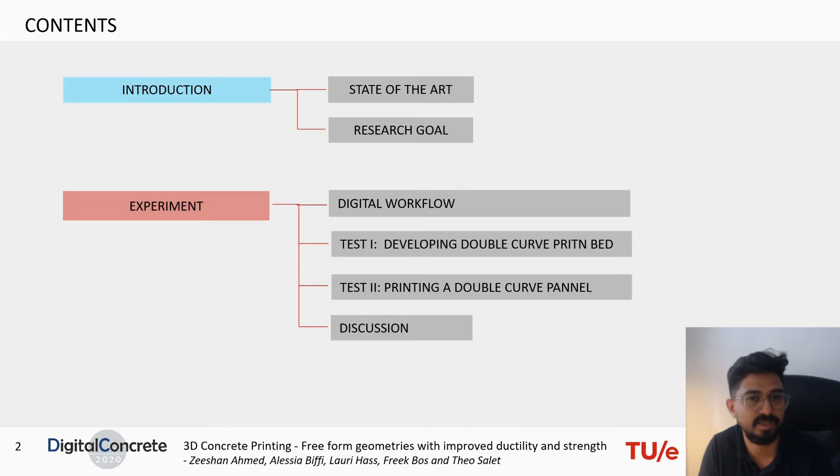Looking into the content of this presentation, I would start by discussing the state of the art relevant for this research, then moving on to discuss the research goal for this project, and finally the experiment. For the experiment, I will discuss a digital workflow and then two tests which are part of the experiment: developing a double curve print bed, and printing a double curve panel. The final test results are discussed at the end.

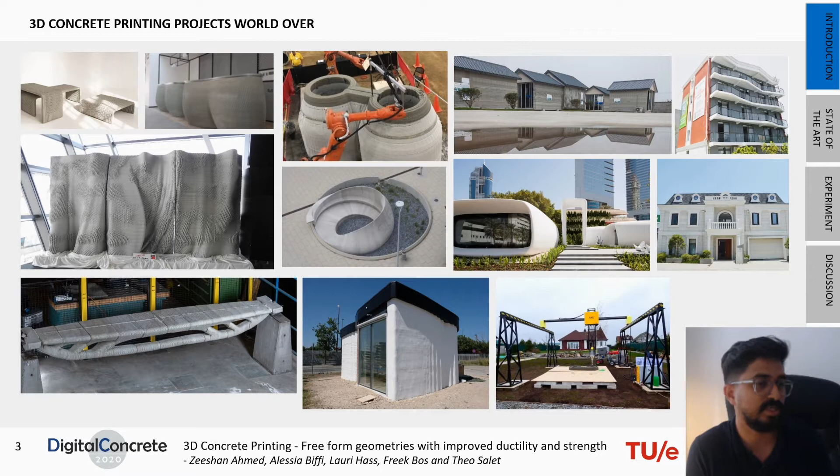Talking about 3D concrete printed projects, the number of projects around the world has increased significantly in the last 5 years. At TU Eindhoven, we have also been part of many of these valorization projects on 3D concrete printing. For example, the Pavilion in 2016, a 3D concrete printed bridge at Gemert in 2017, and there are two ongoing projects: another 3D concrete printed bridge, a 30-meter long bridge at Nijmegen with improved geometrical freedom, and the second is the project Milestone, the 3DCP housing project in Eindhoven.

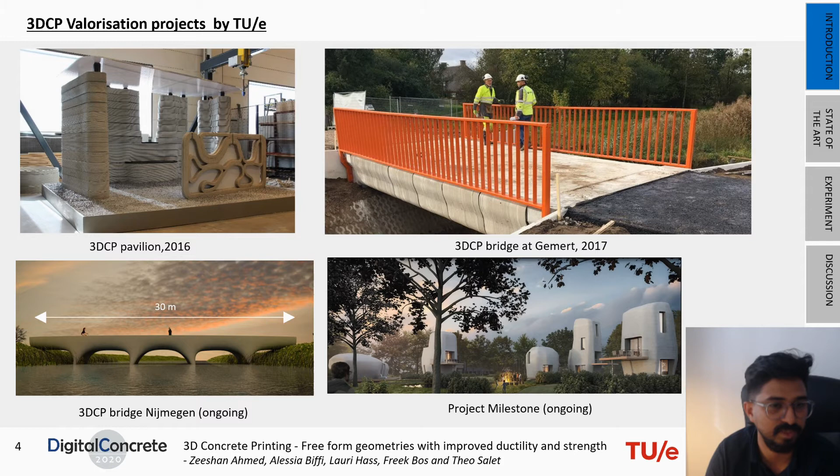Talking about state of the art, I would discuss two topics. One is improving design freedoms, and the second is developing reinforcement strategies relevant for this research project. Talking about improving design freedom, there are two projects which I would discuss.

One is using infill material as a support material for printing, and the second is 3D concrete printing on a double curve print bed. In terms of reinforcement strategies, I would discuss metal cable as a reinforcement strategy, and second, how to introduce fibers into the printed concrete to improve the ductility of the printed structures.

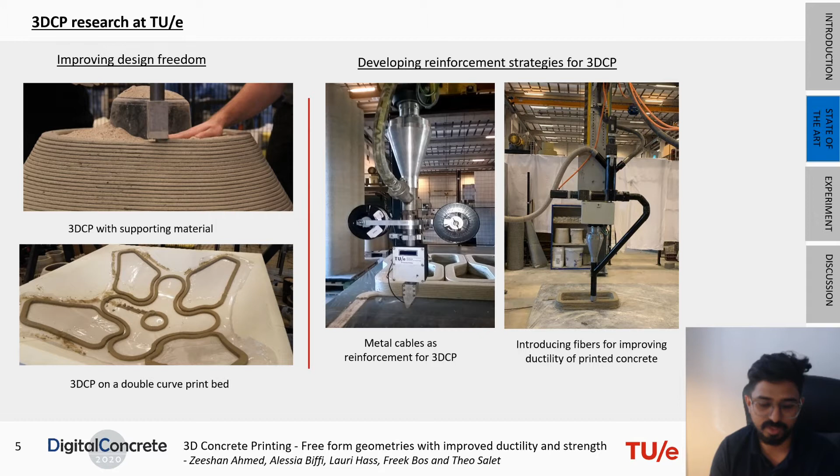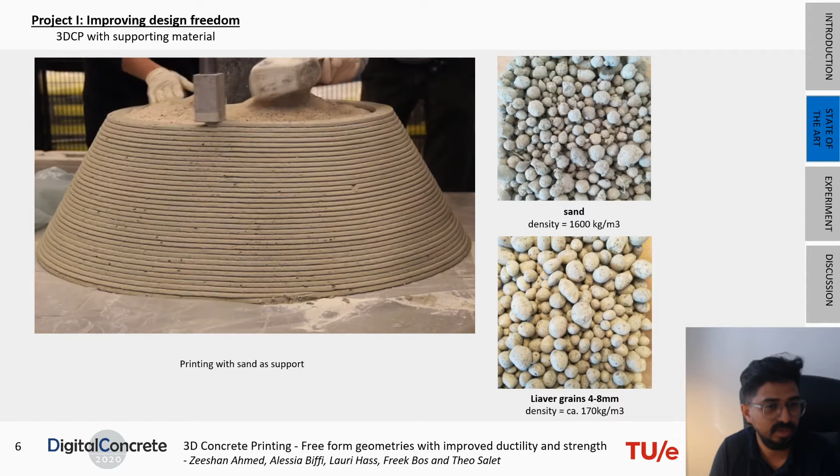Talking about the first project, 3D concrete printing with supporting material, we started this project using sand as a supporting material. But since sand has a high density, we realized we wanted a material with less density or weight to use as an infill material, for which we used Liaver grains, lightweight aggregates used for making lightweight concrete, which have a density of around 170 kgs per meter cube.

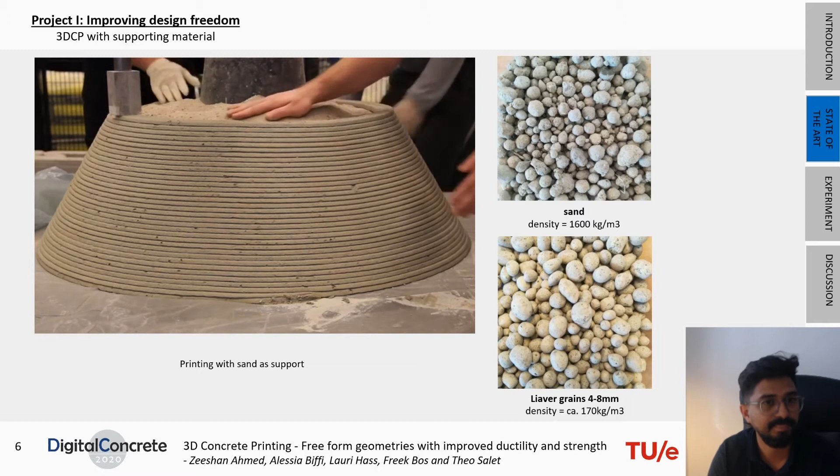For the test, we started by printing in an enclosed box, and simultaneously during the printing process the Liaver grains were added. This showed significant proof of concept, and the project was a success. The next step was to check what degree of freedom we could achieve with this process. For the second test, we checked the maximum angle of inclination, and during this test we realized the best, or maximum, angle of inclination we should limit ourselves to during this process is around 35 to 38 degrees. To make this process more efficient, we also tested it without an enclosing box.

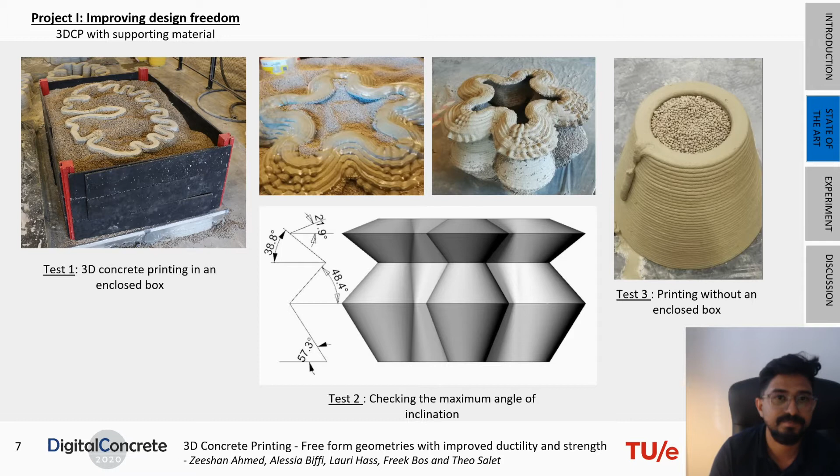Moving on to the second project, 3D concrete printing on a double curve print bed. This project was in collaboration with TU Delft to develop a 3D printed shell structure, for which the outer mold of the shells or panels were printed using the 3D concrete printer, and the shells were filled with concrete. Once these panels dried up, the shells were assembled using temporary support.

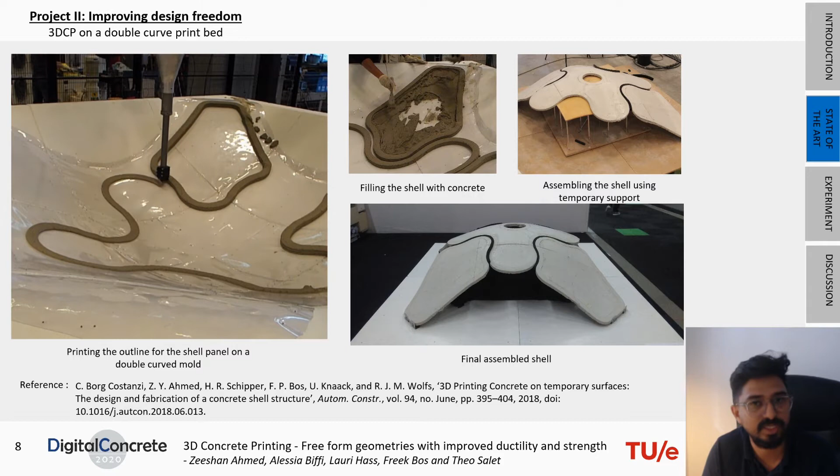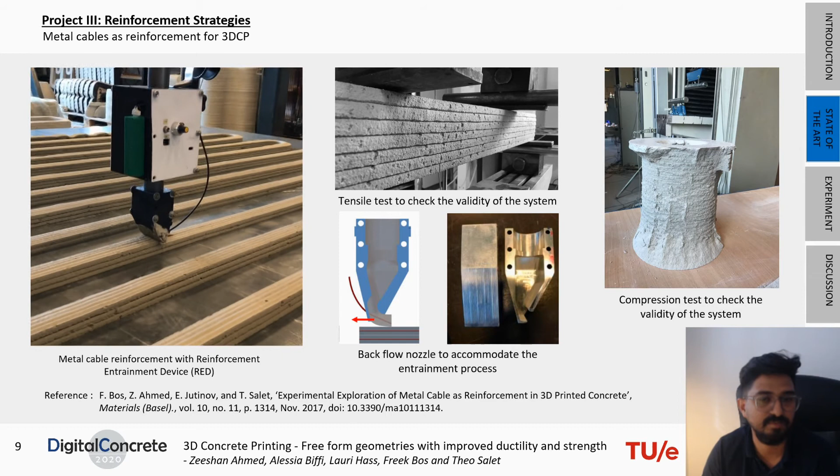Moving on, the third project is on introducing reinforcement into the printed concrete, for which a special device called the reinforcement entrainment device, in short RED, was developed. Special nozzles needed to be prepared with a backflow extrusion, which accommodates the entrainment of these cables. This entire system was tested with various tests like the tensile test and compression test to check the validity of the system. To know more about the test results, please refer to the reference given below.

The final project is on introducing fibers for improving ductility in printed concrete, for which a fiber reinforcement entrainment device was developed. The goal of this device is to introduce fibers into the printed concrete, and this is done using two parts.

First is a fiber suction cum blower device, where fibers are first added manually into the fiber bucket, and through the suction system the fibers are transported into the mixing chamber of the FRED system. In the mixing chamber, the concrete from the concrete pump gets mixed using a motor and a mixing blade, and finally, using another motor attached to an Archimedes screw, the final pumping of the concrete is done, where the concrete comes out of a nozzle.

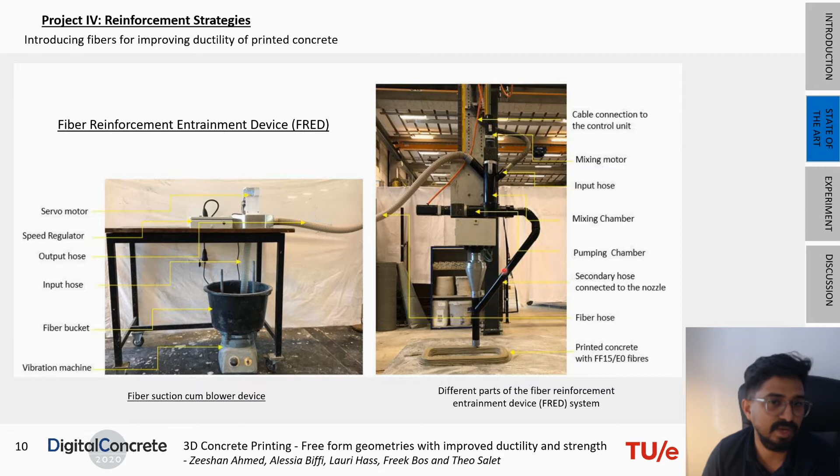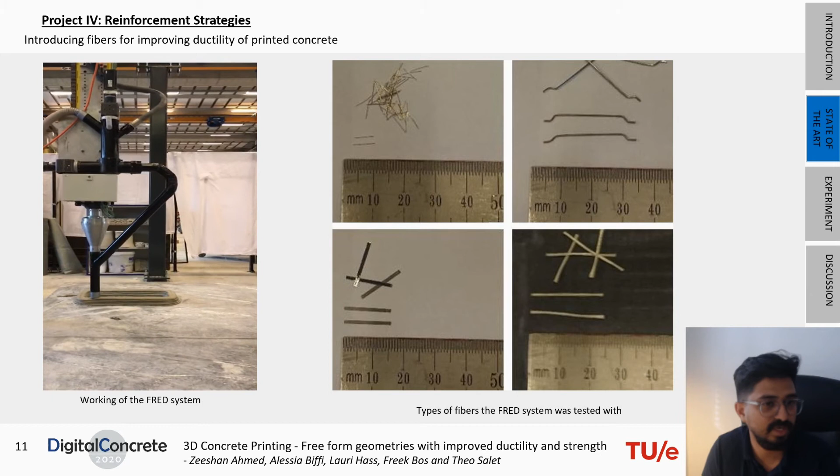To look into the working of this FRED system is shown in the video to the left, and this FRED system was tried out with different types of fibers, both metallic and non-metallic. However, the maximum dimension for the fibers was limited to 30 millimeters, because beyond that, these longer fibers got clogged into the system itself.

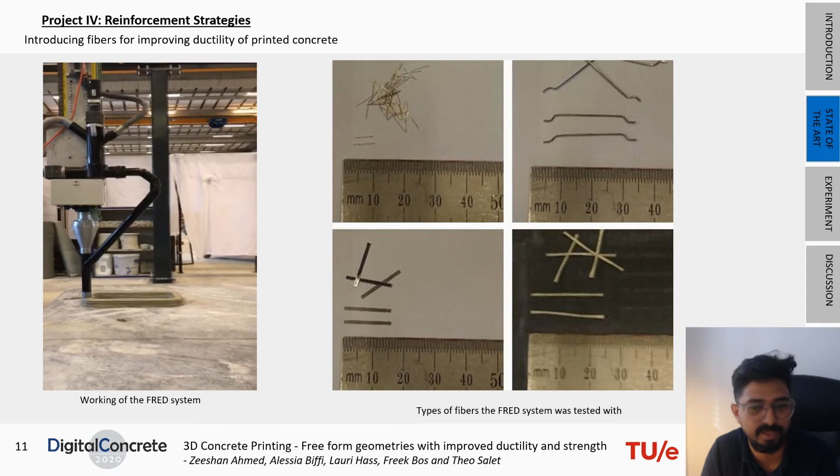So for this research, glass fibers were used, which has a dimension of about 25 millimeters. Once the printing process is done, samples were prepared, and as you can see in the figure, you can clearly see the fibers into the samples.

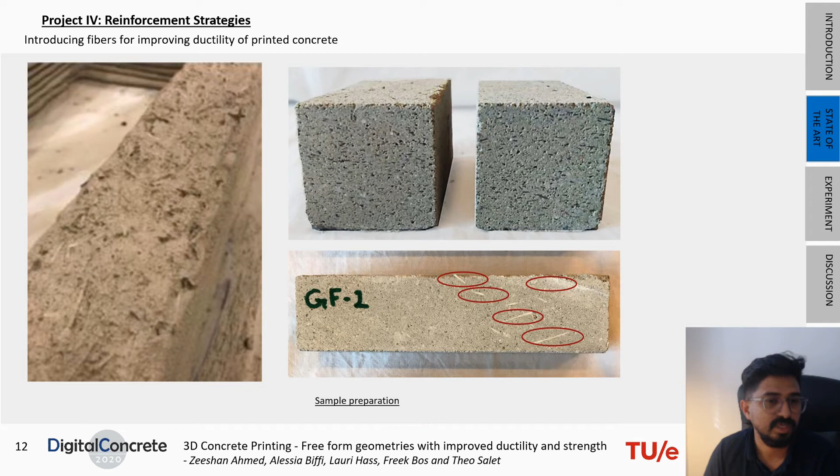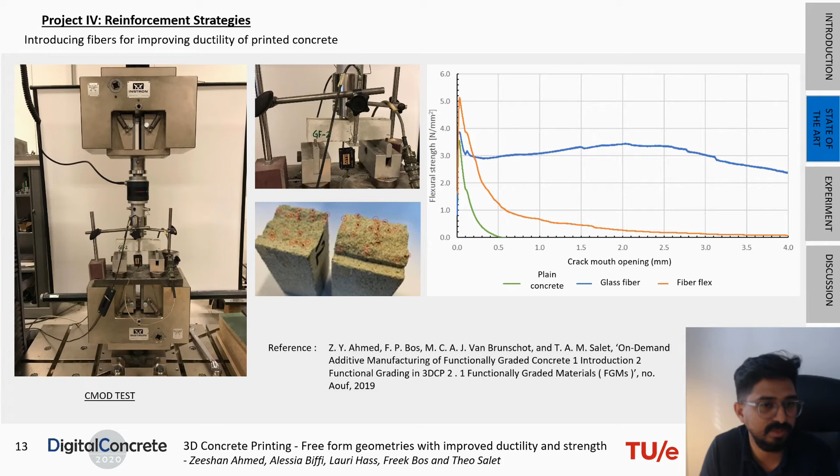These samples, once prepared, were tested with a CMOD test, and comparing the results of plain concrete and the samples with glass fibers, you can see significant improvement in the ductility of the samples. More details of these test results can be found in the reference given below.

Coming to the research goal for this project, the main goal was to develop a proof of concept for all four projects discussed earlier, for which we wanted to design an arbitrary shape to print a free-form object with improved strength and ductility. For this, the experiment, as discussed earlier, is divided into two parts.

The first part is printing a double curve print bed on which the double curve panel will be printed. The double curve print bed was done using the infill material and the RED system for reinforcing the print bed, and second, for the panel, the fibers were introduced using the FRED system.

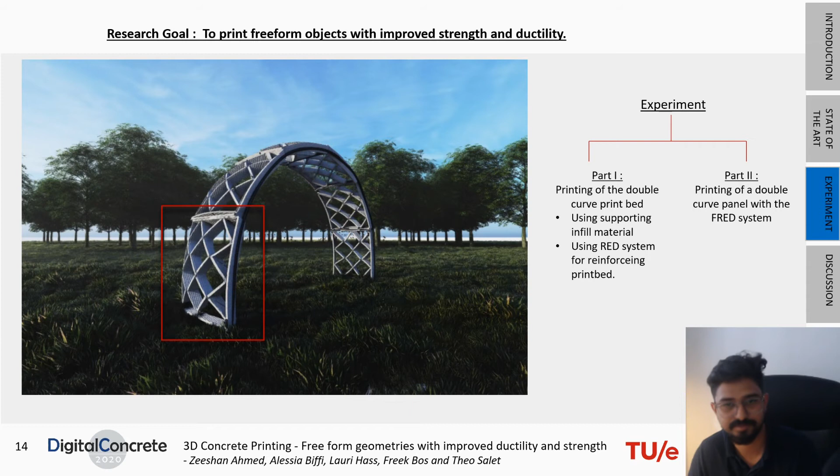Talking about the digital workflow, a script was developed using Grasshopper 3D. The aim of the script was to consider design requirements of the panel as well as the considerations of the robot or the 3D printer itself.

The panel geometry was deduced out of a sphere, considering the maximum angle of inclination, which was kept at 20 degrees as maximum, based on the recommendation from the project on printing on temporary structures.

Moving on, the outline of this panel was used to create the surface of the print bed, and finally the boundary surface was created using a mesh.

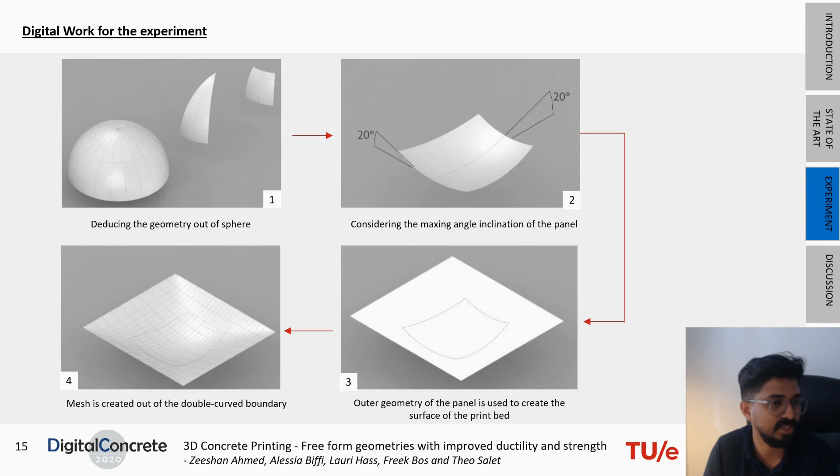Finally, from the mesh, the print bed geometry was developed. To make the print bed, it was tessellated into 4 parts, and each of these parts was rotated 90 degrees before making the print paths for this printing process.

Simultaneously, an internal woven pattern for the panel was also designed to give more internal structure to the panel, and finally both the panel and the print bed were checked to ensure they had the same curvature.

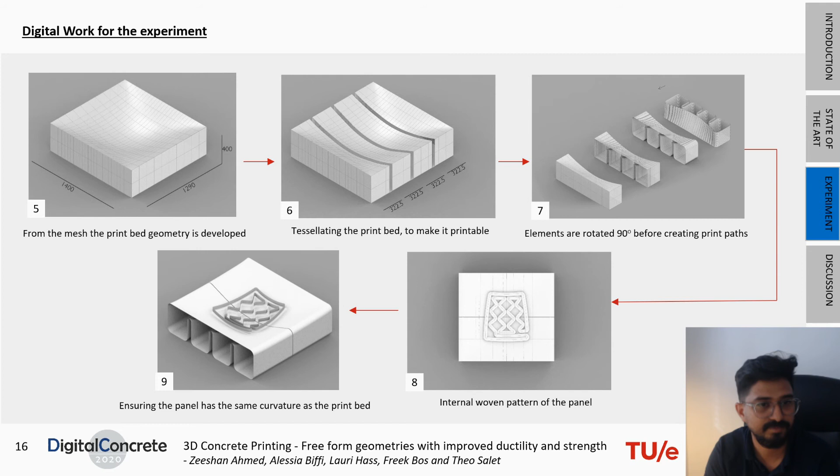Once the print paths were achieved, the printing of the elements was done using the reinforcement entrainment device, or RED system, and you can clearly see from the figure where the reinforcement cable is placed, at the middle or center of the filament. Once all these elements were printed, they were finally assembled.

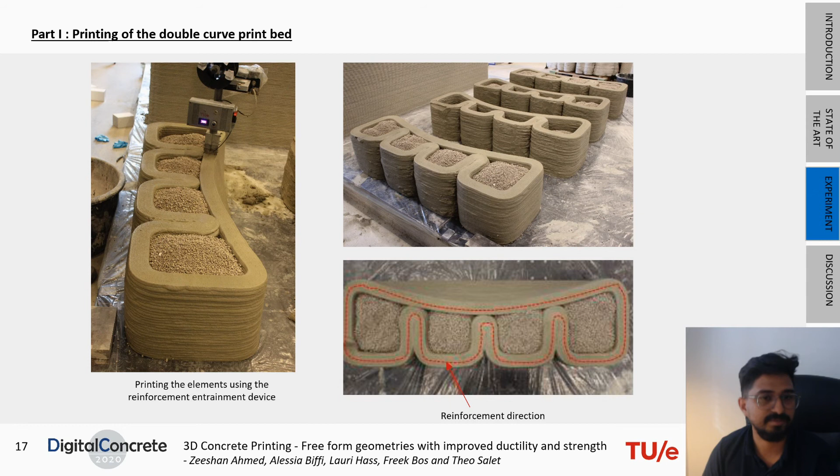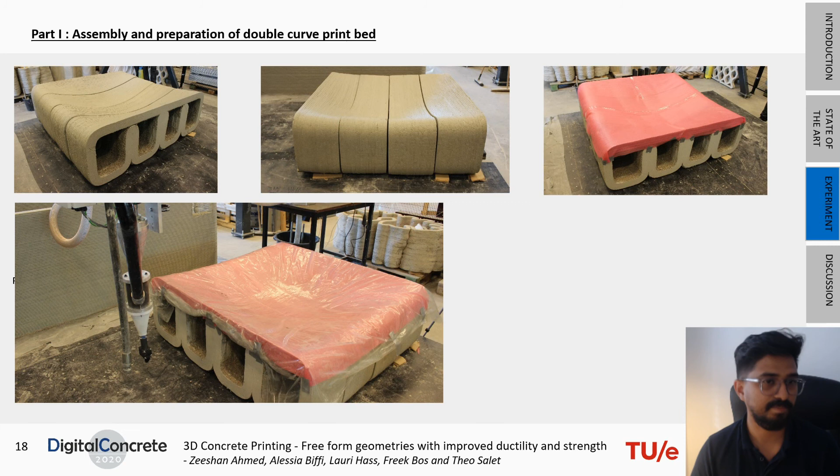During the assembly process, to avoid anomalies, an additional sheet of styrofoam was added to make the printing surface smoother, and to avoid the panel sticking to the print bed, an additional plastic layer was attached. Printing of the panel was done using the FRED system, and for this project the nozzle output was reduced considering the scale of the panel.

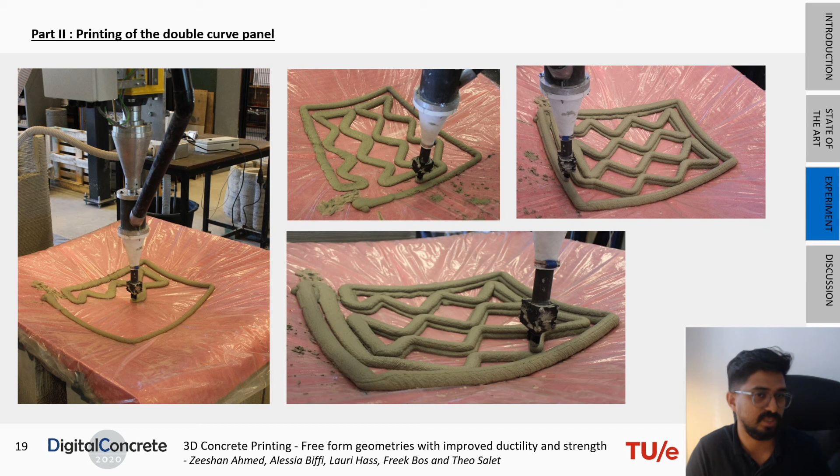During the printing process, as you can see from this figure, some points of the woven pattern were not attached clearly, which was corrected by increasing the overlap between the printed filaments and by adjusting the extrusion rate. Finally, you can see the printed panels developed during this project.

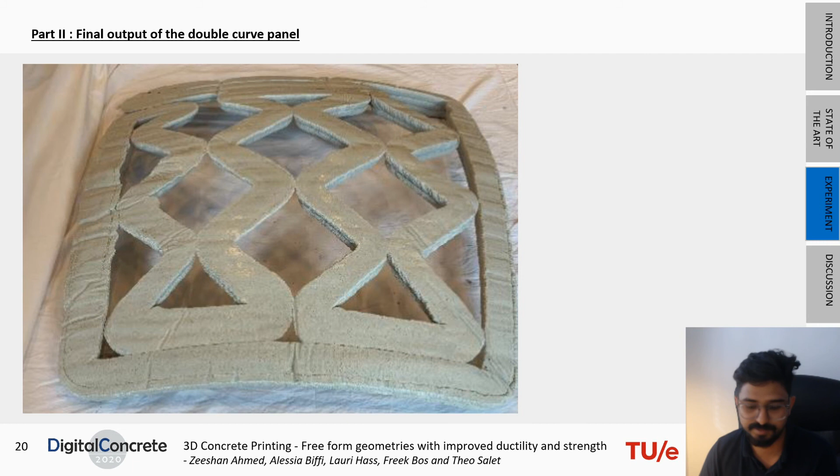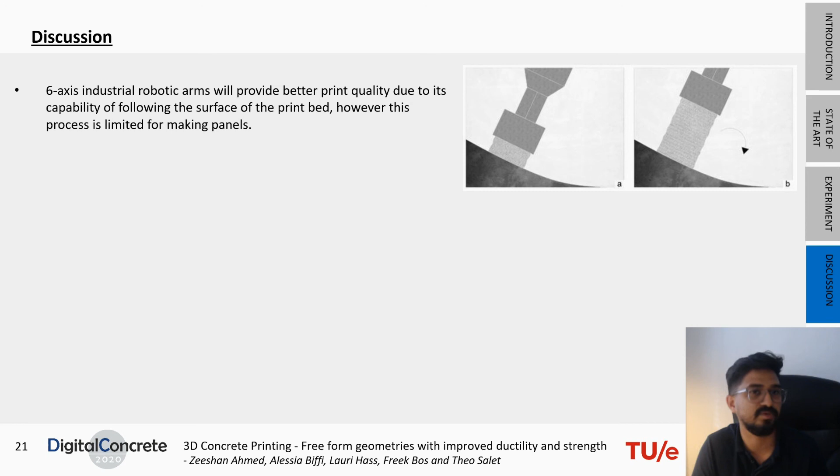Talking about the discussion, a 6-axis industrial robotic arm will provide better print quality due to its capability to follow the surface of the print bed. However, this process is limited because even if we increase the number of layers, at some point it will topple over, so this process is quite limited to making panels.

The second point is combining the technique of printing with infill support, where the RED system shows capability of improving design freedom with increasing tensile capacity for the printed objects. The process of adding infill material during printing needs to be automated, and its limitations need further study.

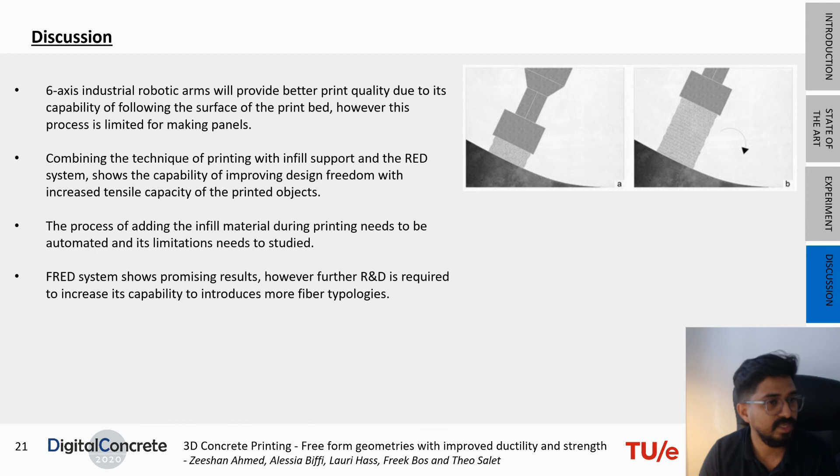The FRED system showed promising results, however further R&D is required to increase its capability to introduce more fiber typologies. Finally, combining the FRED system to make double curved panels with improved ductility gives opportunity for application in building facade designs as well.